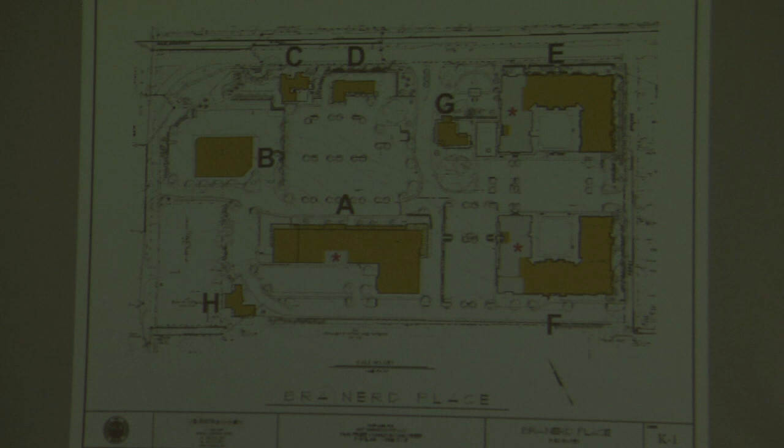You're all familiar with the plan that we came with at the last hearing. And the buildings that Dan was just speaking about are buildings E, F, and A.

Because of the interpretation, we have gone back to building E, and we have carved out 30% of the first floor for commercial, retail, or office. And we have done the same thing with building F.

These two areas have actually worked out quite well, and you'll see in the drawings to come. At the same time, once those units that we've pulled out of these two buildings, we have incorporated them into a second level in building A, which have also turned out quite well and have pretty spectacular view sheds south toward the river. An interesting dynamic began to unfold as we began to rework F and E.

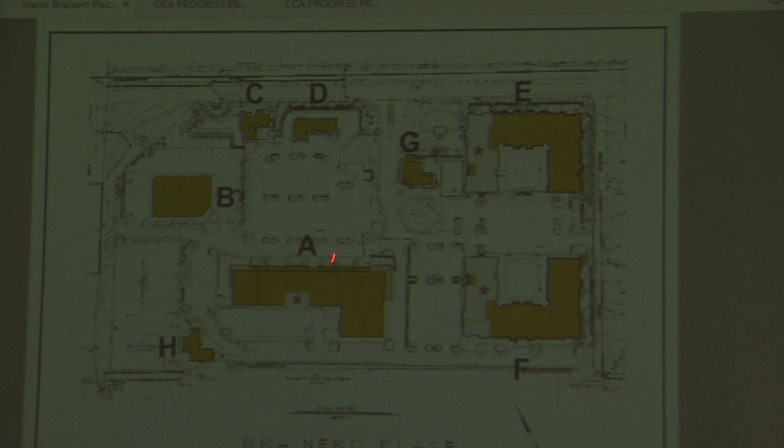Primarily, we were actually creating commercial space along this edge, which kind of dragged or pulled the commercial retail space up along this perimeter. So the entire heart of the campus has retail and commercial space facing this area, with the residential component along the outside edge, which we think is very nice.

In doing that, we created with CCA pedestrian crossing points here between A and F, and between the facades of F back to E, so there's actually a visual linkage for pedestrian traffic. We've also brought in an additional sidewalk off of Marlborough, which comes in all the way along this building here as well. Some of the other changes that have happened to the site, Steve from CCA will go over after I.

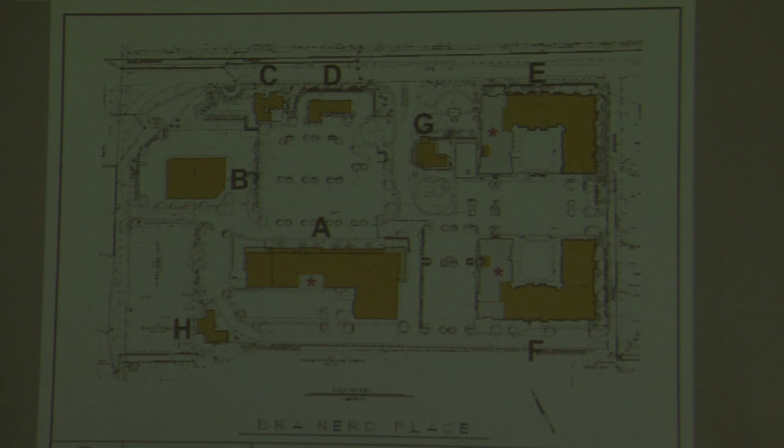So let's talk about the first. Here we go. The only change to the parking level from last time, as Dan commented on, we used to enter the parking garage. This is Building E. Orient everybody, this is Marlboro up here. And we used to have the parking entrance to the garage here. We've since shifted it back into this corner. It's the only change to that plan.

The primary change is on the ground level, and this is that retail office piece. It can be used as a single tenant or multiple tenants, it could be retail or professional offices, and it plays with its own sidewalk and entry point down here to the south. It still works off this main terrace, which covers the parking garage, and there's still an entrance off Marlboro to the residential component.

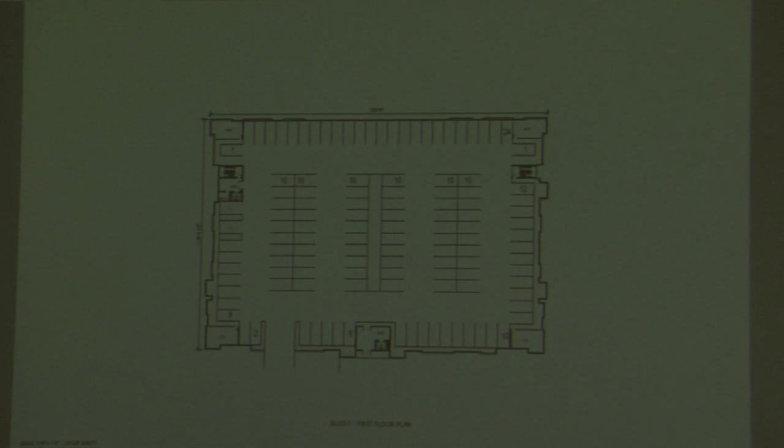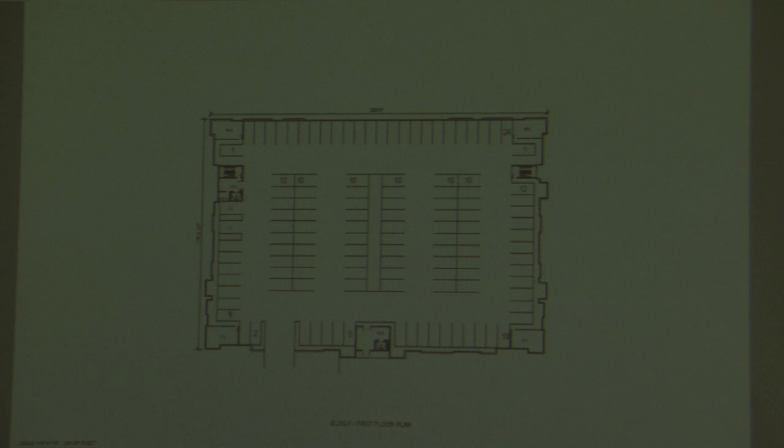The second building is Building F, so your courtyard is up here. You still drive along the back. The entry into the parking garage is where it was the last time you saw this. However, the main level, first floor is coming - there it comes. There's our retail component here, which is actually broken because we need an egress.

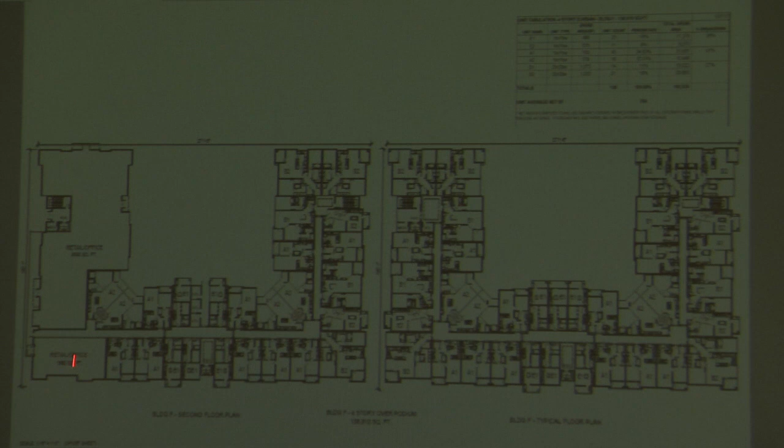A second egress out of the end of this courtyard, or this end of apartments. But again, we have the main entrance, which is up here, directly across from E. The elevator bank comes up from the garage, servicing the apartment floors above, and the commercial space pulls down and around. This whole facade faces west.

This is the north facade, which faces back up. This is your big open courtyard. Again, we're copying that same kind of look we had on Building E. It's all brick on the lower levels with your retail component here. And then the western facade that faces Building A is here.

Because we need to get access to the commercial spaces along this side, we're running a terrace along here, which allows you to get in this door here. But the same concept: marquees at the major entry points, and areas for signage for single or multi-tenant.

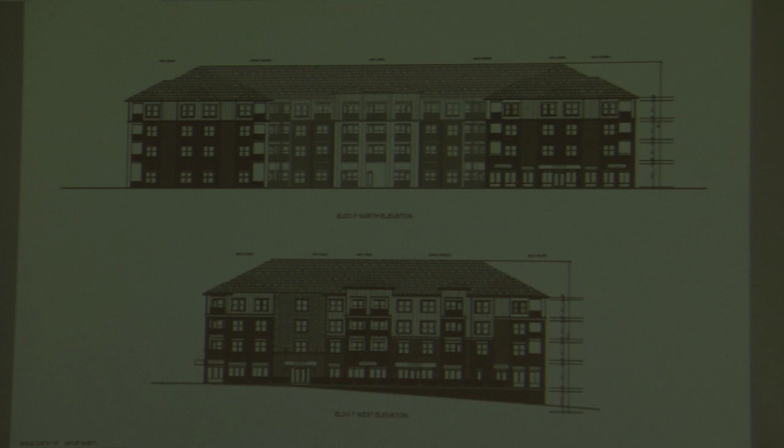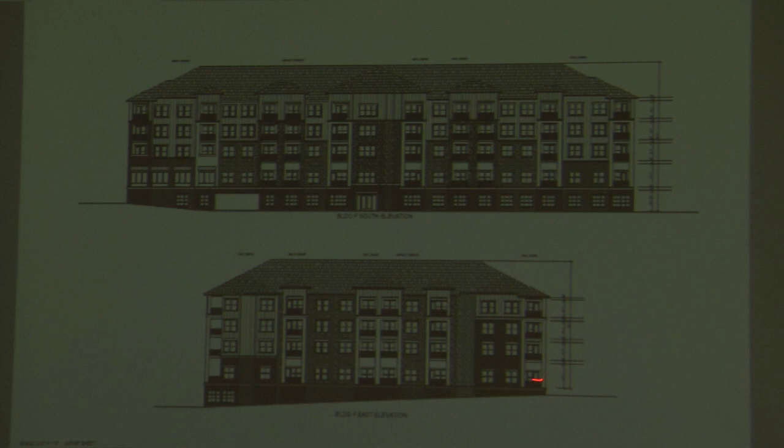The rear or south elevation of this building is somewhat the same. We have a little bit more brick, but the entry into the garage is there. The elevation along Perry Street, the east facade, hasn't really changed much since the last time you saw it.

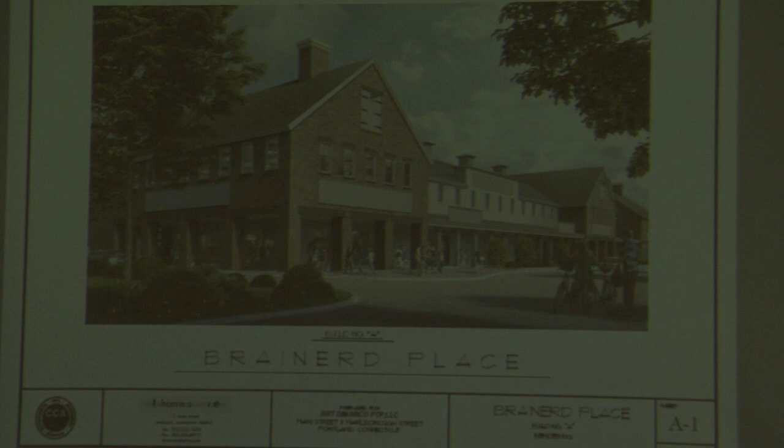Building A has everything you've seen for the north facade, which faces the main parking lot in Marlborough, and the west facade, which faces Main Street, hasn't changed at all. There was a slight discrepancy in our first drawing regarding this corner. It's actually sunk because when the main road comes into this intersection, the grade here is about 24 inches higher than this open courtyard. Steve's drawing can speak to that, but I can also show you when we get there.

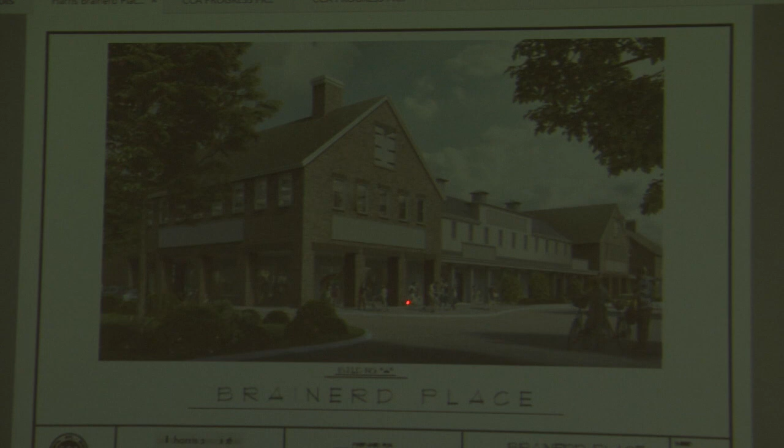This is kind of a softened road edge with low shrubs, because the plaza in front of this building is sunken, and I can show you that when we get to it. The lower level, which is the restaurant level at the end with the sunken court, faces west toward Main Street and hasn't changed since last time, except there's an egress stairwell that comes down through it from two floors up and lands you out here.

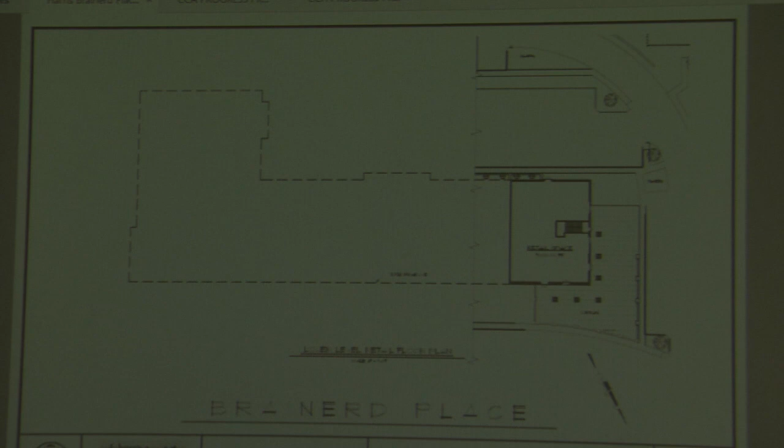The first level, or the primary retail block, which is coming, I hope... there it is. Oh, it went back again. It's a little hair trigger. Try that.

That was the egress well here, but again, the main parking lot out front, this is the corner that comes around the northeast corner of the building. That's the little sunken plaza there. So this grade is level with the ground, but this is actually a sitting wall inside that courtyard. It's probably 24 inches at this corner—the whole wall is 24 inches above the actual plaza, but from grade it sticks out of the ground here 24 inches, and it's flush with the grade at this corner.

The only change compared to last time is that we now have a split use on the second level. Half is commercial office, and the other half across the back of the building will be residential. What was once a single lobby, we've created as a double lobby. The right, or west lobby, is for the offices with its own stair—there's a visual cue that brings you in. There's a main stair that comes up into this lobby with its own designated elevator to the second floor, and the residential component comes in over here, with its own lobby and designated elevator bringing you up to that level as well.

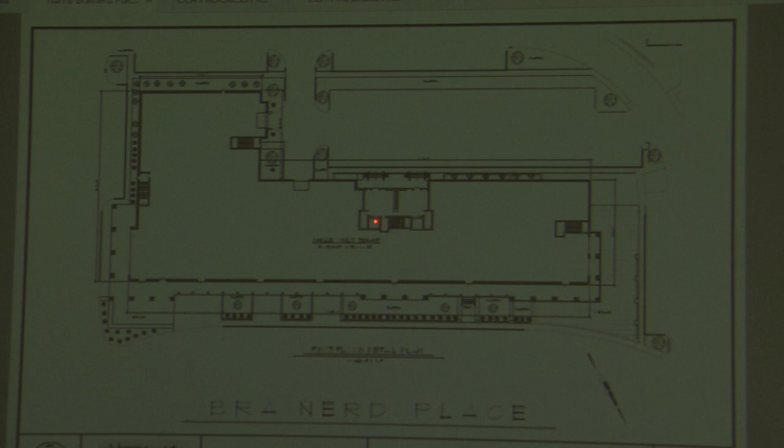On the second floor, the unit count we had pulled out of Buildings E and F, which were 9 units each—what you're looking at here is a schematic space allowance for 18 units. The units pulled from E and F have been plugged in across the back of this building, facing south. That residential elevator comes up here, with a lobby and a series of corridors that bring you to all the units.

The office elevator comes up here, where they actually share a joint egress stairwell in the middle, with designated egress for the apartments here and the office here and there. But the unit count is the same as in the other buildings—one-bedroom, two-bedroom, and efficiency units—and the bulk of these have their own terraces, which are quite nice, with very desirable views off the back.

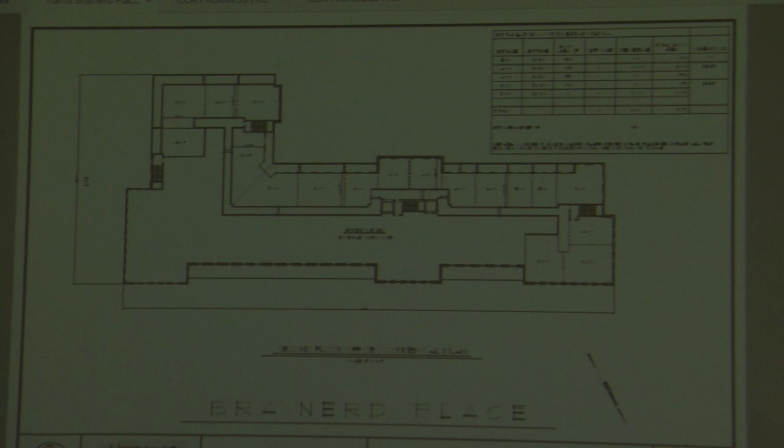The building elevations—it's a little tough to see at this scale, it's a little dark—but that whole front facade we just talked about hasn't changed a bit. This is still primarily all offices, however this corner of the building down here is residential. You can see this little sliver of grade that climbs, so that courtyard in front of this corner is actually set down behind that soft bank.

The western elevation, which faces Main Street, has not changed, except we've added an egress door that comes out here. The tower, which is pushed back, has a little bit of change, which I can get to as we turn the corner.

This is the southern elevation that faces the river and the back parking lot. This corner of the building, as it was rendered and designed prior, is still there, but the second level is now recessed back, and we have a whole series of terraces with privacy partitions running between them all across the back of the second story, accentuating the views and giving you outdoor spaces.

The two lobbies, the office lobby and the residential lobby, are split—they have their own stairs coming up to them and can have their own signage over them. There's a handicap ramp that can bring you up for both. There's a slight change to that facade with windows, so these are a mixture of windows and doors up there.

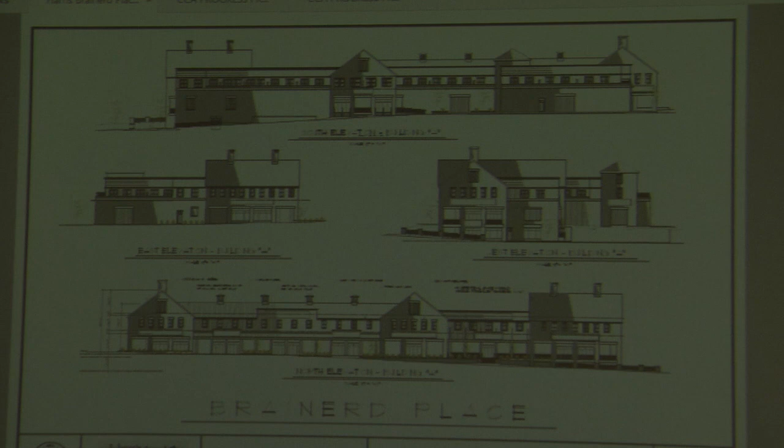That facade has been slightly changed because the second story has been pushed back, since there's a whole series of balconies that wrap that corner as well. With that, that pretty much takes me through the architectural changes, which are fairly modest from where we started.

If I could have Matt go to the— okay. Where's the light on this? Paul? Where's the light, you don't have one? You gotta use mine. There you go, okay.

So, based on the redesign of some of Buildings E and F, we had to make some site changes. These are still a work in progress. We're also coordinating the consultants' comments as well.

Some of the changes involve building heights. For Building E, we took the average finished grade around the building, 10 feet off the building, to the mean level between the eave and the ridge of the building.

That comes out to be 47.6 feet high, and it results in a setback requirement for Building E of 21.3 feet. That building, along Perry, is situated where it is 27 feet and change, essentially, along that side.

Building F, again with the average finished grade around the building, 10 feet off of it, has a building height of 62.18 feet. That translates to a building setback along Perry of 28.6 feet, and that's what we have — the closest point is a bump-out right there at 28.6 feet to the property line.

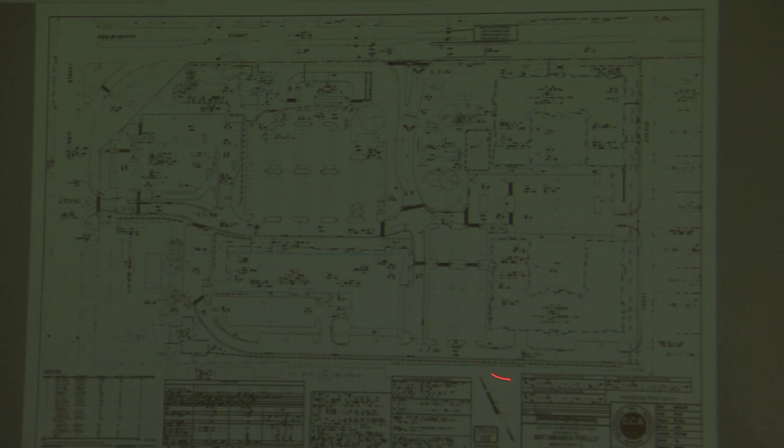We did have a meeting with the Public Works Director, Rick Kelsey, a couple weeks ago. That went well — we were able to coordinate a lot of the utility work with him. So we're continuing to progress on answering all the comments provided to us by the town's various consultants, and we're going to resubmit answers to all those comments, along with a new set of site development plans, in the near future. But we wanted to present the changes related to one of the bigger comments regarding Building E and F, the 30% commercial requirement, and the building height and setbacks associated with that. With that, we can take any questions.

Okay, so do we have the lights back up again, so I can see? Thank you. In the earlier plan I had a number of comments that I'm not sure were answered, but I have some other questions too.

The first one is the use of brownstone — Mike, I'm gathering you really don't want to do that, or you've done enough, so that's fine. The second is the traffic pattern around the drugstore, which I guess is more of a business decision than anything else, and if you want to have an awkward drive-through, that's fine with me. I'm still not clear about the use of the courtyard, so maybe somebody can tell me about that.

You're talking about building A, right in the corner with the two courtyards? Yes, those are just outdoor patio areas. It gives a little primary area outside, whether it's the restaurant in the lower corner or the retail space at the end, to create an area where people can congregate. So whether there's a bench or sitting wall, it just gives room for people waiting for someone, or shopping, to hang out.

Next one is swimming pool safety. That strikes me as a liability issue since you don't have a lifeguard, but if that's what you want and you're willing to assume that liability, that's up to you.

The next one is the number of parking places. I know you reduced it slightly, but I'd be interested in reducing that more if it meets your business plan, particularly since we've got too much impermeable surface. So that's debatable.

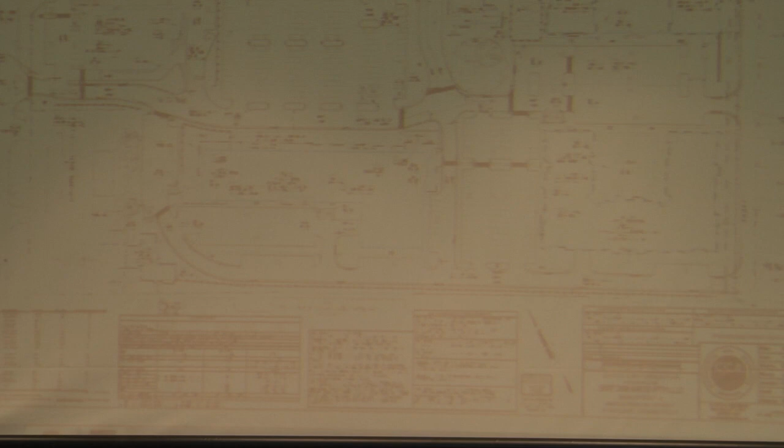The next one is the priorities you set for residential versus commercial construction. You told me that was going to be about 2-to-1, residential versus commercial. If I may interrupt, because of the changes on buildings E and F with the additional commercial, we are now at 68% residential and 32% commercial for phase one. That sounds much better, thank you.

Some new questions, environmental in nature. Talk to me about the heating and cooling systems planned for this complex. Generally natural gas would be our fuel source, but that would be finalized during the building permit phase for the MEP drawings. For both heating and cooling? As of right now, yes.

During construction, there are two questions. First, the use of VOCs—you plan to minimize that, hopefully? I don't see any use for VOCs, quite honestly. Oh good, none is even better. Well, oftentimes in construction materials they do show up. We would use best practices, but we wouldn't want to commit to zero VOCs, as that would introduce a non-standard construction cost for this type of product.

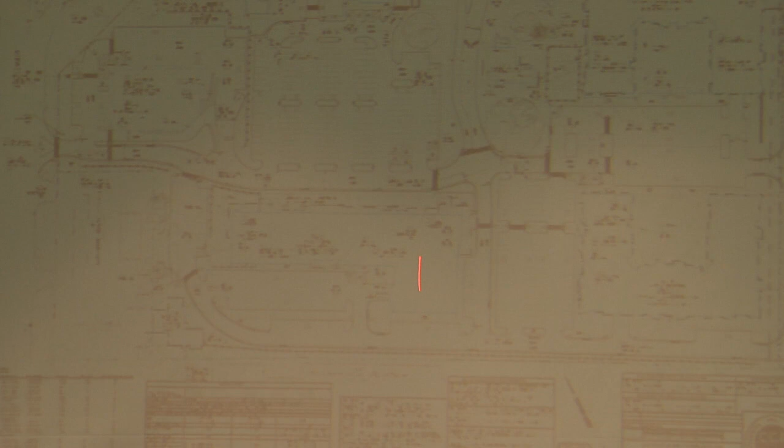We really thought that this shared space between F and A, as you came down the main entrance, would give you a nice commercial feel overall, and then continuing this way, commercial all the way through the rest of the site. So when we started the conversation internally, we said this building here, we can pull that off. We pulled 9 units off of it, and Paul took you through what the changes were. That's going to be pretty neat.

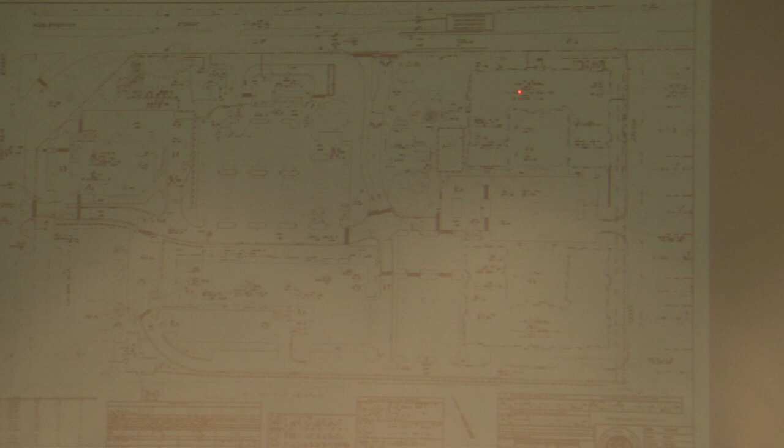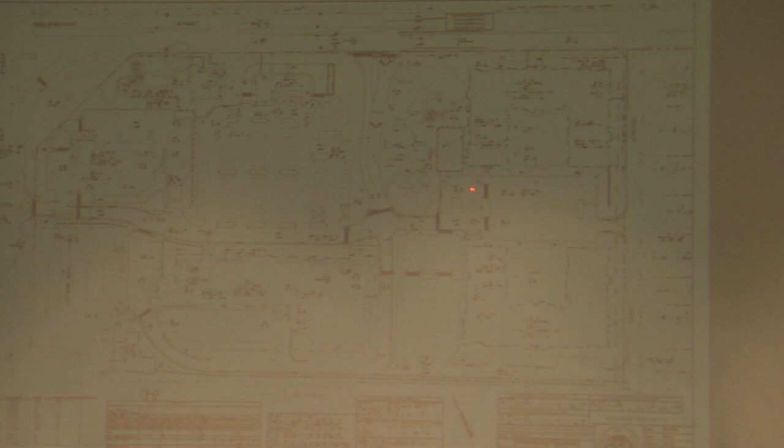This is all good. As you get up here on this wing of E, we're speculating a bit, design-wise, best practice-wise. So let me give you the debate we had internally. You like to be able to drive up to where you're going and have the visibility you get with this whole parking field. That's the other thing driving this requirement for the rest of A. We don't have that opportunity when we get up to E. We have a little bit of parking right here, and then you have a whole wing of the building.

So that is our concern about how much you can come in without having to park really far away to get to these spots. I argued internally that it's offset by the tremendous visibility you have, like in that perspective shot of this corner of the building at the main entrance. As you're coming in and going out, you see these spaces, even though your access to them isn't great. So we hope that will make up for a demerit on the design otherwise.

So I got our partner to go along with saying, let's get all this going. But for building E, we do have a regulation change we're submitting that allows us to go back to the interpretation for a less tall building to be residential only. And it's all driven by the Brainerd House, really. So we have all of these considerations that have come up because that's here already, and we designed the whole entire site around it.

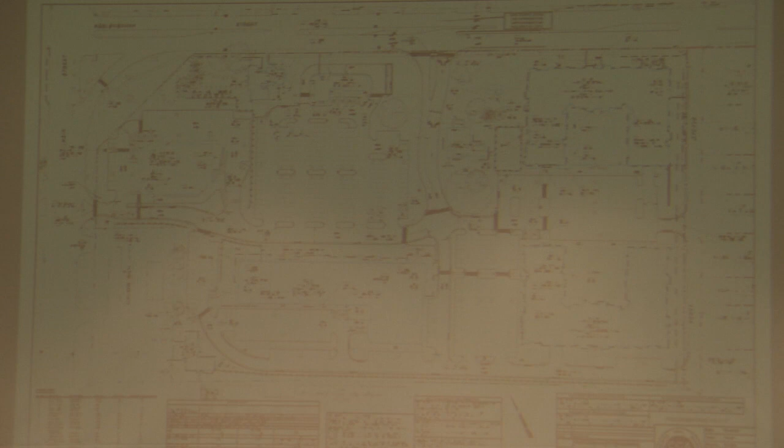So we're in, okay, and we're showing you how we can accommodate the request. We'll take the field, but that regulation change we're asking for is that we could go all residential up to 50 feet if we do the setback. That's what we're asking for in case we fail, and we'll have known that before we build building A, so that we can make the shift later. Does that all make sense? I'm sorry that's a mouthful.

Other questions or comments by members of the commission? I just wanted to ask, do you have underground parking for this building A? No, okay, it's all surface.

They get a nice view, but they don't have covered parking. Exactly, yep, that's their trade-off. But I will say this, and I had never thought of it: those terraces looking out back towards the bridge will be cool units, and we think they could be premium units for that reason. Otherwise, having 18 units all by themselves isn't terribly efficient. You have the elevator just for that few folks. There are costs associated with it, but I think it'll work.

That part, that's not what I'm worried about on this plan. It's really this section up here. Other questions or comments from members of the commission?

How was the percentage of green space? Did it change overall? No, we're still in the 20... 30%, yeah, in the 30% range. But it'll be updated. Most of what we did was shifting.

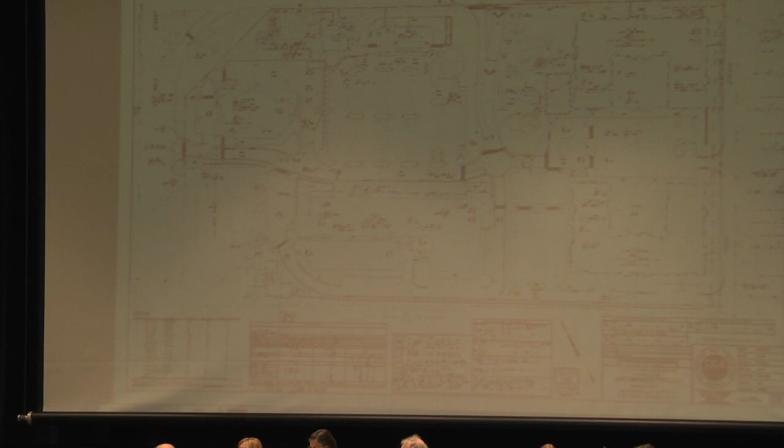Within the volume defined before, right? So we put the retail and commercial into the footprint, and then you have to change the facades to make it all look right. Paul's comments, I think he really nailed a few things.

Those second floor balconies being the parapet wall versus see-through. When you're walking into a professional commercial space, that's a nice touch, right? Rather than some guy drinking a beer, right, 5 feet up, that kind of thing. So there are some nice pieces in those building elevations that addressed the shift nicely.

And also you have those extra 3 feet I talked about, so you are a little bit more separated from that second level. Other questions or comments from members of the commission?

So in your next iteration, you're gonna talk a little bit more about the landscaping and stuff? Yeah, we could. I think we could do that now. Yeah, if you go to the other map up there, I can go to the other plan.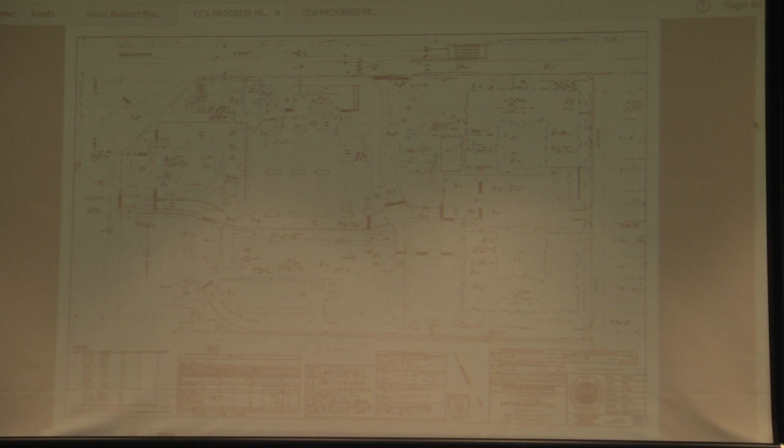So, but let me let Nick do his thing. He's certainly going to be better than I. There's any other... Did you get the lights down a little bit? Sure, you can go down a bit. Somebody must have control of lights. Yep, see? There we go, it's magic.

For the record, Nick Ushjack, landscape architect, CCA. There were some comments basically about the existing trees, making some reference to what was on the site to begin with.

And we are, by necessity, removing the dawn redwoods. In this iteration of the plan now, we are proposing to replace the dawn redwoods at some key locations on the site.

We are introducing a group of 3 dawn redwoods at the intersection of Main and Marlborough. We are also introducing a grouping of dawn redwoods at the main entrance. These will initially go in at about 10 to 12 feet height, so that they will have some size to them to begin with. In addition, there is an individual dawn redwood down here by the Hart Jarvis building.

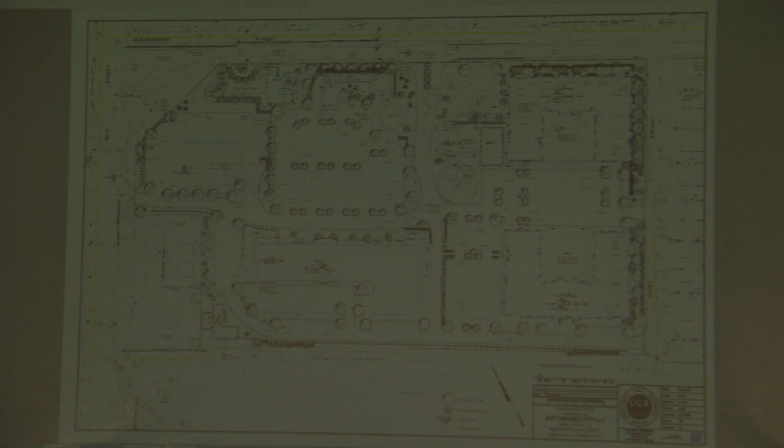So we are referencing the existing planting that we are removing. Also, in various locations on the site, we are introducing more white pines, because there are white pines presently along the south edge of the site that are existing. Along the south edge of the wall here, where space permits and utilities permit, we are adding evergreens, combinations of spruces and hollies and white pines, also over here at the southeast corner.

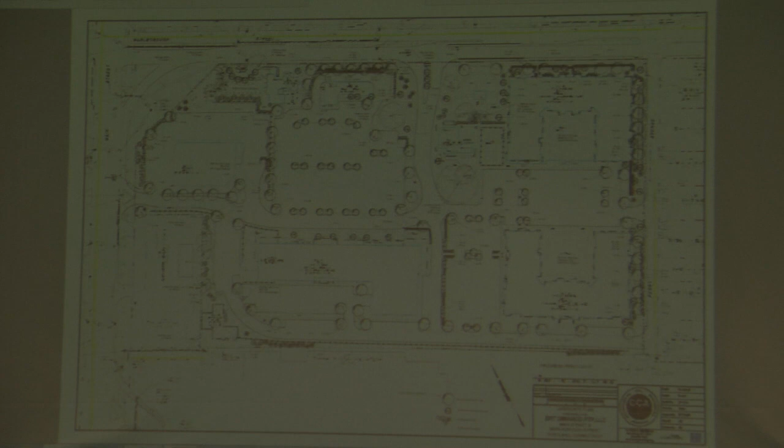As far as what you're experiencing along Marlborough Street, when you're coming up Main, there are combinations of shade trees. There's some low screening to the pharmacy building. And up here, we're keeping a grove of existing trees. So the combination of new plant material, the existing plant materials, and then as you move along to Marlborough Street, you have a small courtyard off to the side here with flowering trees against a backdrop of existing trees.

There is a large sassafras tree, 60 inches in diameter, which will be preserved. As we come up to the coffee shop, there is a larger buffer area now that the driveway is 18 inches in width. So basically...

18, yeah, that would be a good trick.

18 feet in width. Along the coffee shop here now, we have a row of shade trees in combination with hedges and grasses, so that the experience as you're walking by is varied. You have the canopy of shade trees, flowering trees, and hedges and grasses so that the cars are shielded from view, but you can still look over at the building as you're walking by. There'll be evergreens, roses, ornamental grasses, so it'll be a more interesting tapestry of shrubs as you're walking by. And once again, we have the redwoods here.